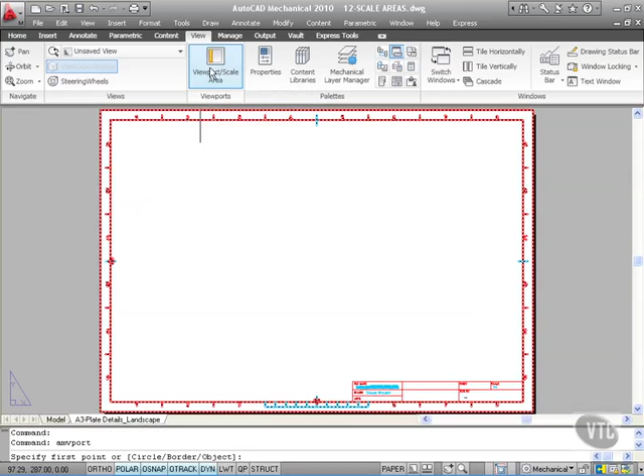So what I'm going to do now is I'm going to go up to the View tab here and go to Viewport Scale Area whilst my Layout tab is current. So click on Viewport Scale Area and come into the drawing. It asks me to specify the first point as if I was drawing a viewport. I'm actually going to right click and go Border, like so. I'm going to pick on my plan view.

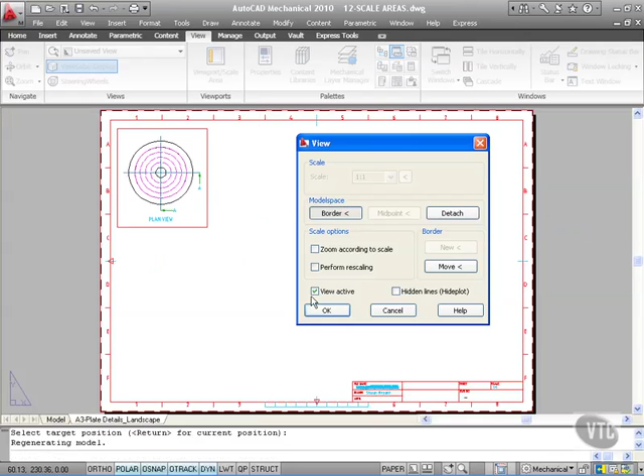Now these borders here, these scale areas, are all set to 1:1. So I'll just click on that border there, and there it is. I can drop that border into my drawing. There it is in the layout, ready to go. Now I'm going to make sure that the view is active, and then OK it, like so. Now that is a 1:1 viewport.

If I double click inside it, it highlights like a viewport, and there's 1:1 viewport scale there on the status bar. I'll just double click outside that viewport to deactivate it. So that's my first scale area brought in as a viewport. Now, this is where it gets kind of cool.

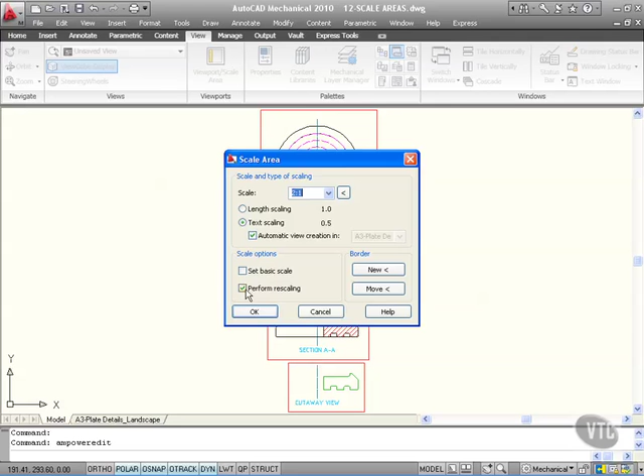If I go to the Model tab now and double click on the scale area, I'm going to change the scale there to 2:1. I want it twice as big. I want everything twice as big. Make sure Perform Rescaling is on, like so, and then click on OK. I'm then going to select the objects for rescaling, which are those bits of text there, and right click to confirm. So that scale area now is set to show at twice its original size.

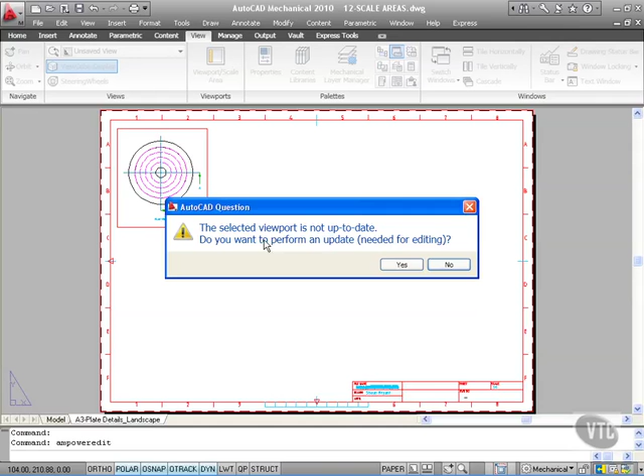If I go to the Layout tab, like so, and then double click on this active viewport, it tells me that the viewport is not up to date. Do you want to perform an update needed for editing? If I say yes, there's my twice as big viewport. I'll position it on the drawing like so. Job done, click on OK.

Isn't that clever? Now you can do that with any of your scale areas here. So if you place a different scale area in your Layout tab, you could update it here and then update it in the Layout tab. I've only done that with the plan view for you. I'll leave you to do the rest. It's very easy to do. You just create a viewport.

If I double click in there, you can see that's a viewport, and it's now at 2:1, where we've updated it for editing. Double click outside the viewport to deactivate. So utilize those scale areas in AutoCAD Mechanical. Very easy and quick to create viewports in your Layout tabs.